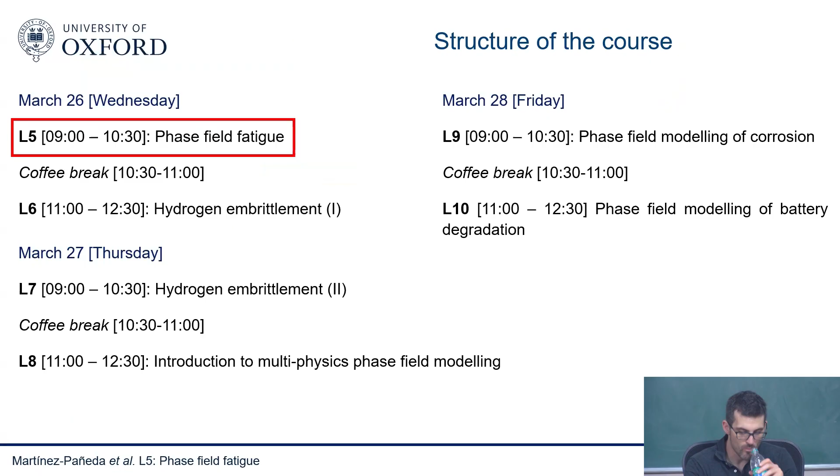A reminder of what we discussed in the very first lecture on Monday: there are basically various regimes in fatigue. We have a first regime where everything is very microstructural dominated, where most of the time you spend nucleating a crack—this is the most challenging regime in terms of understanding and prediction. Then we have a regime where you already have a macroscopic crack that is growing, following Paris law. Then there's a final regime where your crack is close enough to the final crack size driven by static fracture, so it just grows very fast.

So how do we characterize things in regime B? This is the Paris law—this is what everyone uses. It's still a bit empirical; you have a C and an M parameter that you need to fit to experiments. It would be great to reduce that empiricism, to actually figure out what this C and this M mean from more first principles, more mechanics.

The other regime is regime A, this first stage, where basically you're nucleating a crack. This is very microstructurally dominated, and normally we evaluate that regime with S-N curves. We run experiments where most of the time we're nucleating a crack, alternating a uniaxial tension test with cyclic loading until we measure failure of the sample. We get a lot of scattering, but we get these kinds of curves used in fatigue design. So these are the two ingredients, and I guess the question is, how does phase field fatigue fit into those ingredients? The idea is relatively simple.

So basically you add a fatigue degradation function that reduces your fracture toughness. There have been other groups following other approaches. This is the one proposed by the group of Laura De Lorenzis, a paper by Pietro Carrara and co-workers in 2020.

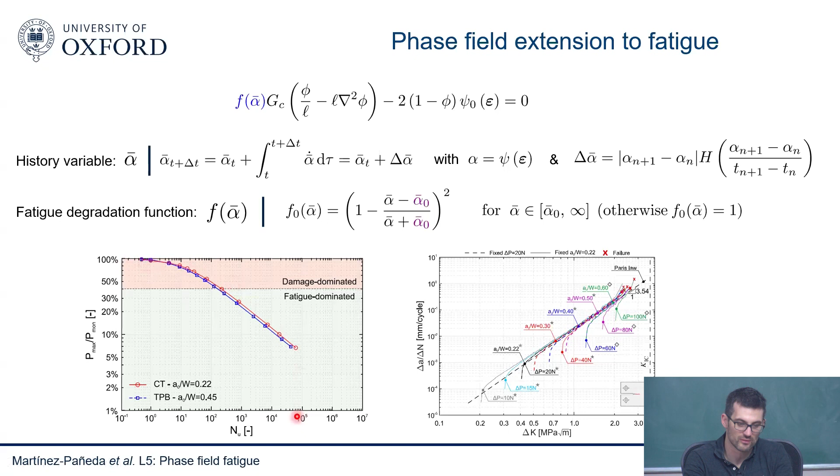But here you can see that, without any experiment, you capture both SN curves—this is load versus number of cycles to failure—and Paris law type of behavior. And again, the Paris law comes out of the model. Remember, Paris law has this C and this M—I don't put any C and M into this model, I just run my simulation, the same model that I use for an SN curve.

You can see here, this is for a load of 10 newtons. It goes like this, and eventually you fail. So it's not only Paris law, it's the entire regime—you can see that we capture the entire regime with this model. It looks promising. Again, there are some things to polish, but it looks quite promising, because a lot of people use Paris law, and you need to do an experiment, but that's okay, we can run an experiment.

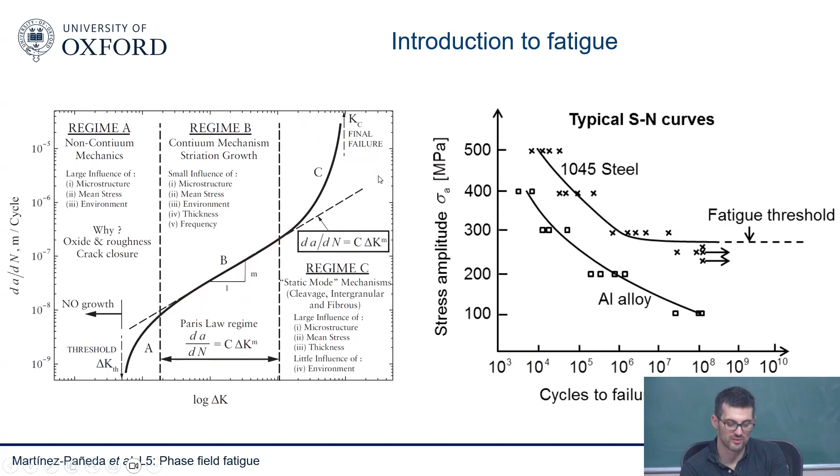But Paris law is only appropriate for a certain regime, so there's a danger that you're applying Paris law where it wouldn't make sense, on either end of the curve. So this model not only reproduces Paris law, but it's also able to capture the whole experiment from the delta K threshold all the way to complete failure. You can see it in all these cases for different load ratios. So it's quite promising—you can get SN curves and Paris law out of the model. It's not an input to the model, it's an output of the model. This is the main difference with other existing models.

We started working on this, and this was work done by my student Alireza Golahmar, who I co-supervised with Christian Niordson in Denmark. Aligesa was funded as an industrial PhD student by a company, Vattenfall, who are looking to extend the lifetime of offshore wind turbines. They operate and manage the oldest offshore wind farm in the world, called Horns Rev 1, in Denmark. These offshore wind farms, I'll talk more about when we discuss multi-physics problems, are supposed to last only 25 years, and the oldest one in the world, Horns Rev 1, is 24 years old now. So they very soon need to make a decision on whether to extend it or not.

Because fatigue is so empirical, that 25-year decision was something, you will see, a bit crude. So they were hoping to improve those predictions with some mechanistic modeling, and they funded this PhD studentship. But he had a very practical mindset, and said, I'm interested in publishing papers, but I'm also interested in coming up with something that is useful.

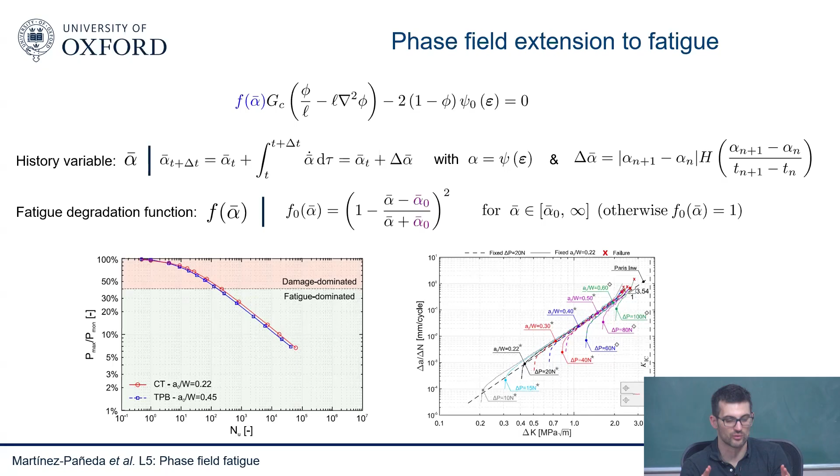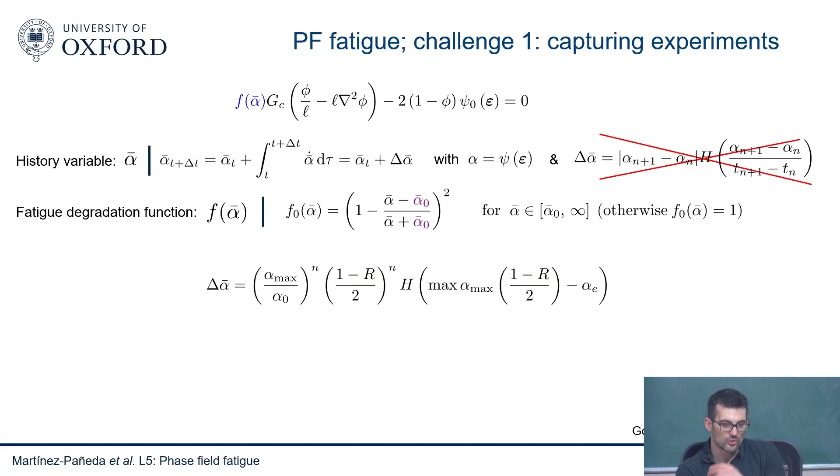So then he realized there were multiple challenges. The first one was that this model was all very qualitative, but when you try to fit experiments, it wasn't good enough. He needed more flexibility, so he changed his approach a little bit, changing the way we accumulate this alpha increment, and came up with this equation. He said, this is what I need to capture experiments.

The idea is that you have various ingredients, but basically you accumulate your cycling variable as a function of these variables. This is the Heaviside function, there's a term that accounts for the load ratio, there's an exponent n, and this alpha 0. So this is the load ratio that you apply, meaning we have an extra parameter. That's the price to pay, you add an extra parameter. But he felt he needed that extra parameter, otherwise he wouldn't be able to capture experiments.

But what was important was to define this n term that wasn't present before. We have the alpha 0, but we didn't have the n. With the n, he could see that he could capture any slope of the S-N curve. So the model that Laura's group proposed was good, but it didn't allow you to capture every S-N curve, at least with that fatigue degradation function. He was able to capture this S-N curve, and he also found a relationship between this S-N curve and the Paris law behavior, so the parameter m in the Paris law relationship could be related to this n behavior, which you can show theoretically for linear elastic materials.

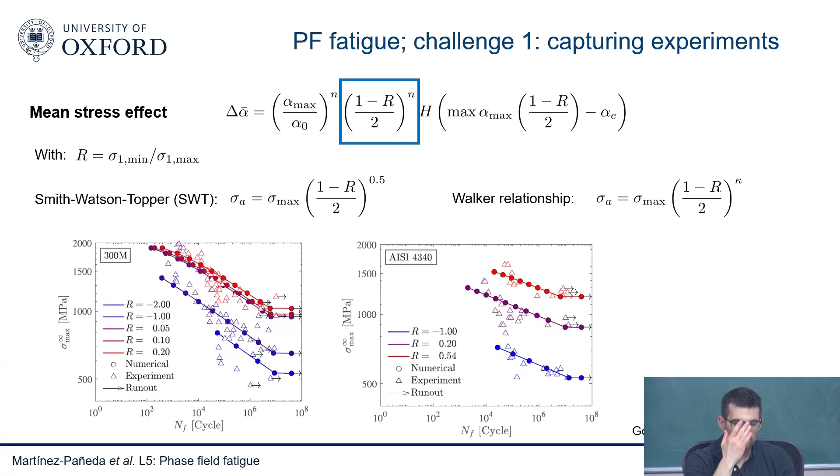Quick question: so the degradation, is it as a function of cycles? Do you upgrade at the end of the cycle, or is it happening also inside the cycle?

Yes, very good question, we'll discuss a bit later on. Initially we solve maybe 10 increments per cycle, so you solve the entire cycle. But it's true that you only accumulate damage in the tension part, and this is something we'll discuss in a minute, because different splits depend on which split you accumulate. Griffith will accumulate in both tension and compression, but in reality, we only accumulate in tension. So you have to do some tricks there, and at the end you end up accumulating only in the tensile part, which allows you to jump over cycles because you only care about alpha max. This becomes very important later on, because one of the challenges is computational cost. We're running cycle by cycle calculations, so if we don't need to do the full cycle, if we just have the peak, you can jump over cycles. This is a very good point.

Just to finish, the last ingredient here was the endurance limit. So he wanted to incorporate the endurance limit.

This is widely used by engineers, sometimes when you oversize things to make sure you are below the endurance limit. You have this Heaviside function, and you have this extra parameter, alpha E, but it comes from experiments. For each material we have tabulated data of alpha E, so it's an extra parameter, but it's again a physical parameter - we know what is the threshold.

You can see the relationship here. This is the definition. So I wouldn't say it's an extra parameter in the sense that the endurance limit of a material, we have tabulated data for each material, so we know this before we run the simulations. Just connecting a little bit with the seminar yesterday, ideally we want models where we know all the parameters before we run any simulation.

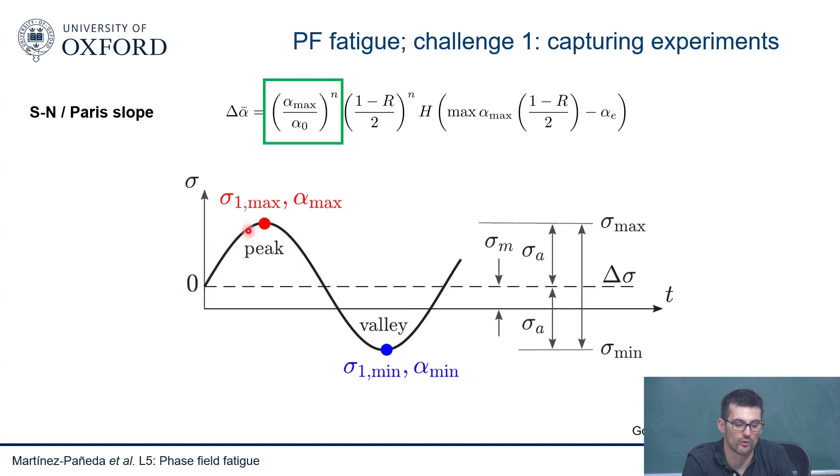So if we go here, this is important because it relates to the question Anna was asking. We want to accumulate here, we don't want to accumulate here. The no tension split is the only one that accumulates damage only here. And the good thing about this is that if we know the damage we accumulated here, we also know the damage we accumulate on the way back. So that's the only thing we care about, the alpha max.

So this is the second challenge. You need to pick a strain energy split that accounts properly for this decomposition between compression and tension. And it seems that the no tension split is the only one that can handle that. Otherwise, you're going to get very different responses depending on which strain energy split you use. The other aspect is the calculation time.

Being able to run fatigue calculations cycle by cycle is very powerful from a predictive perspective, because very often, of course, we do our experiments assuming a constant stress amplitude, but in reality we don't have a constant stress amplitude. Right? So we work with people, for example, in batteries where they charge electric cars, and they do have a history of loading, but every user charges their electric car in a different way, so the battery is exposed to a completely different cycling history.

So that's a problem. Normally in fatigue, the way engineers get around it is by assuming linear elasticity, superposition, and you basically do Miner's rule, so you accumulate damage here and there, some sort of accumulation of damage based on superposition. That's okay, it has worked for many years, and some things are falling down, but not everything is falling down. But there are many situations where this doesn't work out very well.

If you have an overload, or for example, when you have other phenomena happen like corrosion fatigue and so on and so forth, being able to actually handle any arbitrary loading history is very powerful. But of course, if you need to run millions of cycles with phase field, you need to resolve the fracture process zone, you need to resolve that length scale, so you need a fine mesh. If you need to do that, and in addition do millions of cycles, that's going to come at a cost.

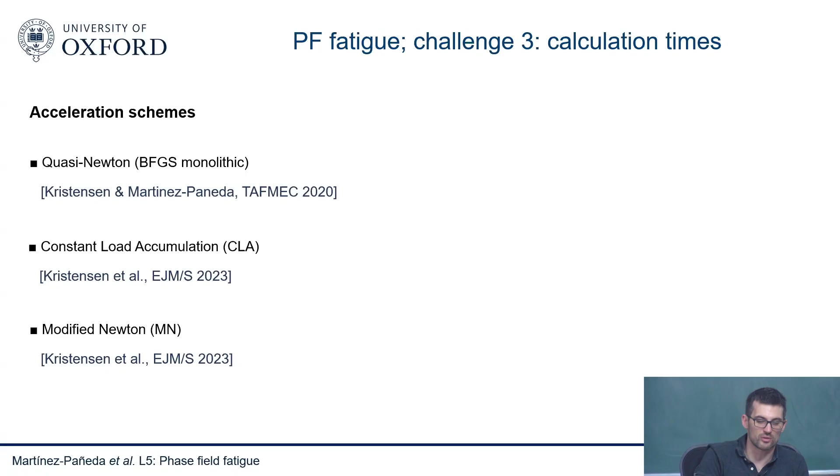So it's very much on the computational side of things. There's a paper by Laura De Lorenzis recently comparing various approaches. Our take on this was using first a quasi-Newton approach, this BFGS monolithic scheme. This was discussed the other day.

When you compare particularly to single staggered schemes, these are far more efficient. You can see we get the right result with 4 increments per cycle versus staggered approaches where even with 500 increments per cycle, single pass, you're approaching the good solution, but you're not even there. So that can be a deal breaker.

Every time you see single pass stagger results in fatigue, you need to take it with a pinch of salt because it's quite complicated.

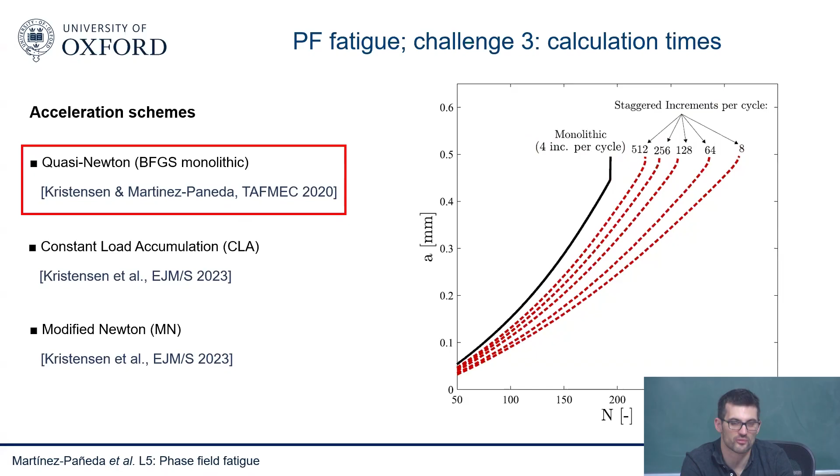The other approach is constant load accumulation. Since we only care about the tensile part, we may not have to resolve the entire cycle. This relates to the question Anna was asking - we don't have to go tension, compression, tension, compression. You could in principle just move along this line. You just need to know what load you're applying.

You can see here the different approaches, and you get exactly the same result basically. This is the original formulation, this is the constant load accumulation. At the end of the day, you accumulate the same alpha with the number of cycles. You just need to think of your alpha max.

And then you can combine this with something called cycle jump. This is used quite a lot in computational mechanics when you do fatigue. If you imagine modeling millions of cycles, 20 million cycles, then cycle 1,234 is likely going to be quite similar to 1,235. You're probably going to accumulate the same amount of damage. So maybe you don't need to do every cycle - you can do 1 cycle every 10, 1 cycle every 100, and so on. That's another idea, this kind of cycle jump.

You need to be careful not to jump too fast. Some people are now coming out with error schemes that tell you how far you're deviating. The other approach we took was this modified Newton method - if the cycles aren't changing too much, maybe you don't need to build the stiffness matrix every time. You could just solve with your original stiffness matrix and rebuild every X number of cycles. With the combination of 2 or 3 of these acceleration schemes, we are getting to calculation times that become sensible.

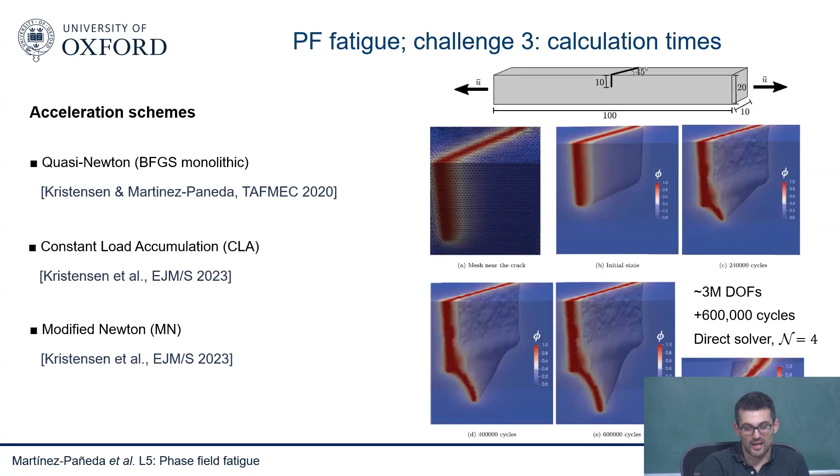Yeah, I guess one can play with those things. I don't expect big gains on that front. Yeah.

And I think what was interesting about these models is that it's a paper we have almost done. We haven't submitted it yet, but we were quite excited to show that we can predict the relationship for linear elastic materials. For plastic materials, there are other things happening. But for linear elastic materials, we can go from SN curves to Paris law, and this is something that hasn't been done before.

So these two stages of fatigue are treated independently: one is Paris law, and the other is the SN curve. You could think both must be connected because both tell you how a material degrades under cyclic loading, but they had not been connected. We can see that this is the case with our model - we run simulations for different values of this n coefficient.

And we get different slopes when we run the Paris law. So somehow there's a relationship between the slope of the SN curve and the slope of the Paris law. We can show this is not only qualitative, but also quantitative. We've shown theoretically, through calculations and integrations, that by considering a damage mechanics approach, you can determine that the C value and the M value of the Paris law are related to the SN curve.

So M is related to the inverse of the slope of the SN curve, and C is related to the fracture toughness parameter that depends on the fracture toughness and M. And here you can see the comparison of the model with experiments on PMMA.

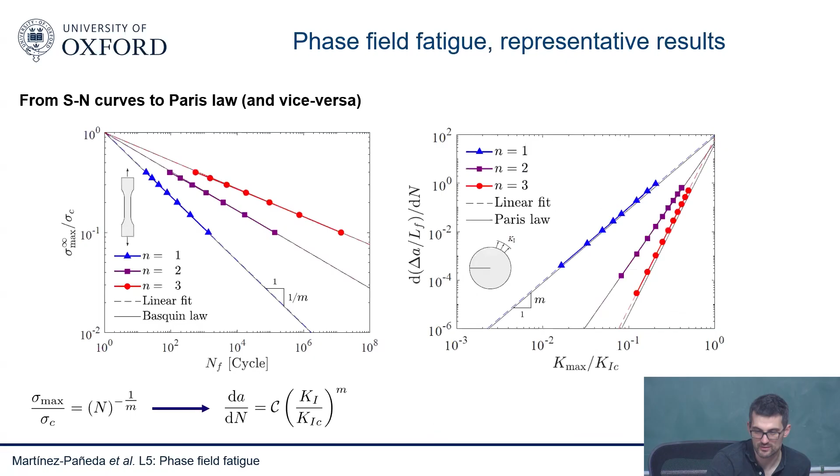Correct. So how do you implement the R ratio experimentally in those cases, especially in the case of Paris law? How do you account for the R ratio? Yes, so the model has an R ratio component. This R ratio component becomes more significant in the case of the SN curve, while it becomes less significant in the case of the Paris law, because it's more toughness dominated versus strength dominated failure.

So it seems to... we don't have extensive validation, so it's very difficult to find data in the literature for this. It has to be linear elastic materials, like PMMA, where they do SN curves at different R ratios and Paris law at different R ratios and so on. But so far it seems to be working okay.

Again, for linear elastic materials, in elastoplastic, high regions of the SN curve, you have a change in behavior and there's other things happening. So again, very much ongoing work.

We haven't even submitted this paper yet, but I think it's exciting in the sense that we finally understand a little bit of what's underlying this kind of Paris law, which was very empirically driven, and this kind of SN curve behavior, this kind of Basquin's law, which is also very empirically driven. The idea that you can go from one test and predict the other one, that's I think also quite powerful. So I'm excited about this. It's still ongoing work, there's things to polish, but I'm excited in the direction that it's going.

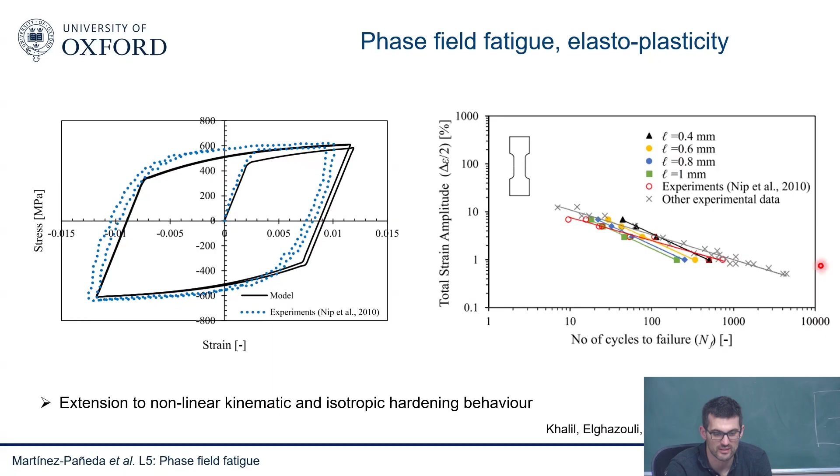So what we did here was to extend the constitutive model to account for nonlinear kinematic and isotropic hardening behavior. You can see that it reproduces the cyclic response that you expect from metals. This is for some steels, and the model seems to agree with what we see in terms of the SN curves, in this case, total strain amplitude for low cycle fatigue.

Yeah, I guess the takeaway is that you can combine these phase field models with any choice of constitutive model that you feel you can incorporate here. Of course, the more things you add into the model, the more you need to think about things, and the more choices you have to make.

So for example, here we have this alpha that you accumulate, the elastic plus plastic strain energy density. We normally assume that only a percentage of the plastic work is stored. But when you're talking about fatigue, for example, a lot of the community that do crystal plasticity and so on typically consider only the stored plastic energy, because they say it dominates completely the behavior ahead of a crack. So the picture becomes much more complicated, and there are some choices one has to make.

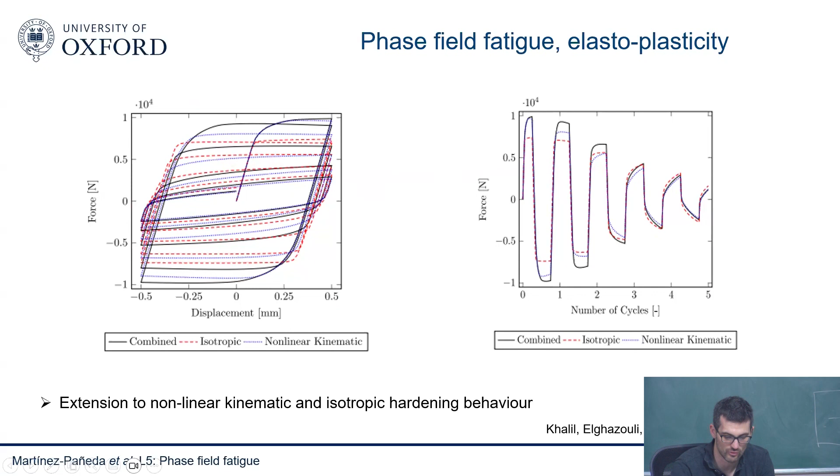So, again, very much an ongoing discussion, nothing consensual yet, but I just wanted to show you that you can calculate this isotropic nonlinear kinematic behavior and incorporate those things. And you can do that not only in small scale samples but also large scale samples. You see a pipeline here where we did this sort of fatigue simulation, and you can see the propagation of cracks and so on.

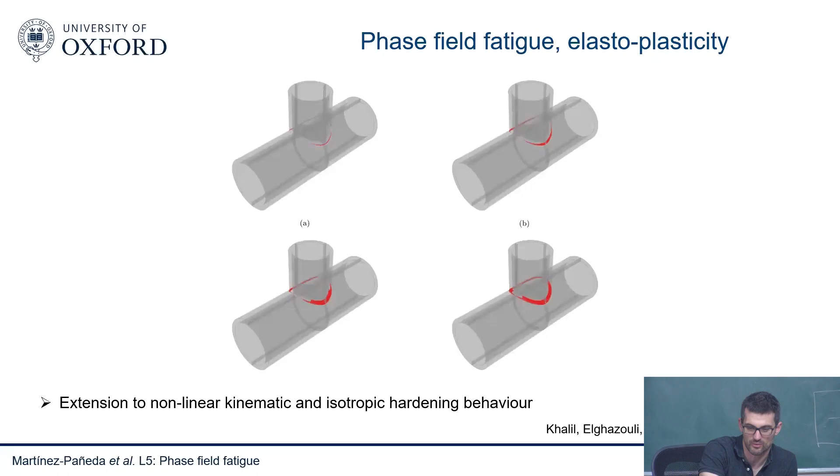Okay, the last item I want to cover before the break is related to fatigue and the impact of surface roughness. We were just talking yesterday, visiting some of the labs here and talking with one of the academics, explaining how much they're interested in the impact of surface roughness on fatigue life. This is a well-known effect. We know that surface roughness has a significant impact on fatigue life, so people are quite worried about that.

Normally there's a number of reasons why you may get a rough surface. One of them is your manufacturing method, and this has become a very hot topic due to additive manufacturing. But the other one is corrosion and problems like this. If you have some sort of aggressive environment, you get a rough surface, and then you get a degradation in your fatigue life. You're not sure whether the degradation is due to the effect of the rough surface, or the combination of corrosion and fatigue, and so on and so forth.

So there's significant interest in trying to quantify this effect of surface roughness, particularly these days due to additive manufacturing. We know that we get a rougher surface in additive manufacturing, and we know this is going to damage our fatigue life. How much is it going to damage our fatigue life? How much do I need to improve? What kind of treatments do I need to do? This is something that is well known.

So for many years, people have been working on this, and I'll talk about work that my postdoc Sara Jimenez Alfaro has done. The paper is currently under review. But basically what people do in the community, the fact that your fatigue life degrades significantly with roughness is something that people have known since, I guess, the 70s or so, quite a long time ago. And people came up with basically what they call a surface factor, this KS, surface factor.

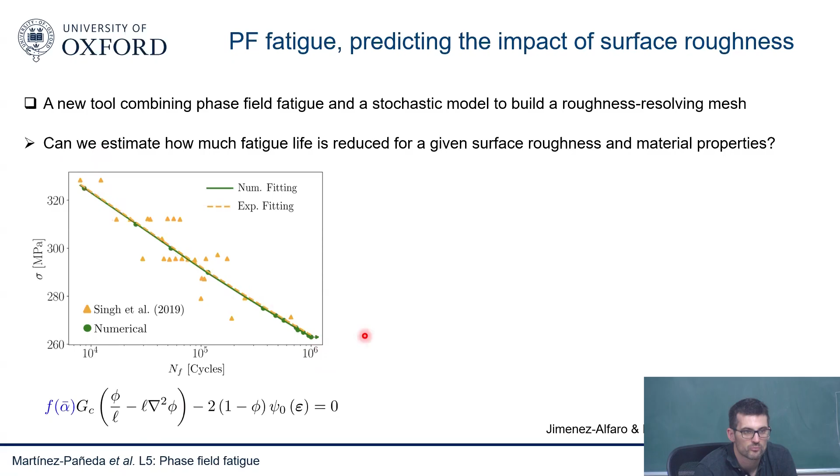Now the question is, what do you do with the roughness? You need some sort of statistical model, so you need to develop a new finite element tool that allows you to capture this. People normally quantify roughness using typically two parameters: this RQ, which can be related to another one called RA, and a correlation length. This will be the case, for example, of a perfect roughness — you have basically a quantity, which is the normal to the surface, giving you how much roughness the surface has, like a bit of white noise.

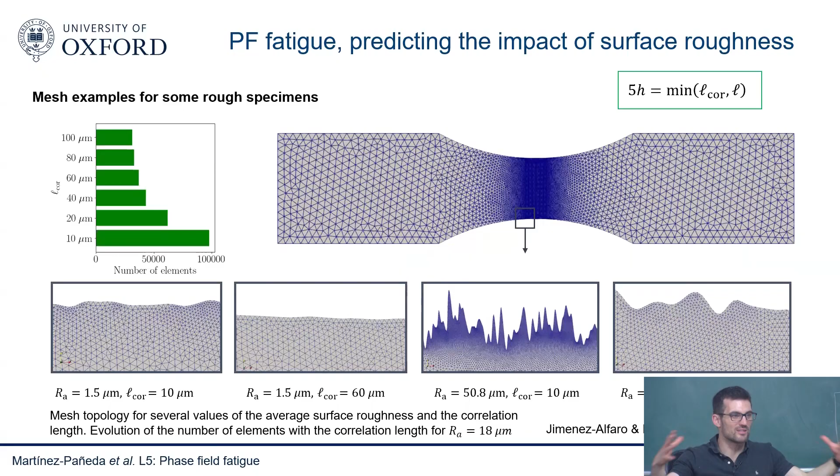But every time you generate a mesh like this, there's going to be some sort of a stochastic element. You're generating some noise, so every mesh that you generate is going to be slightly different. So you need to run enough calculations to get a statistically representative result, and then you get a bit of a scatter. So once you do that, you can compare with experiments.

Let me see, yeah, you can compare with experiments. I forgot to include an image, but you can see that when you run more than 30 calculations, more or less, you start seeing your margin of error decrease. So you start seeing how the number of surfaces that you tested for those two variables start seeming enough. But basically, this is what you get.

They didn't provide that value, so we had to basically take a range of parameters between the values that are typically reported in the literature, which means that we get a bit of variation in our calculations.

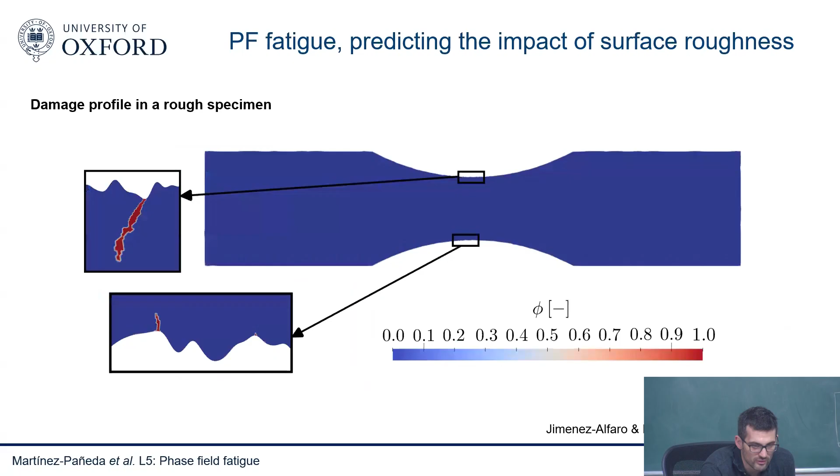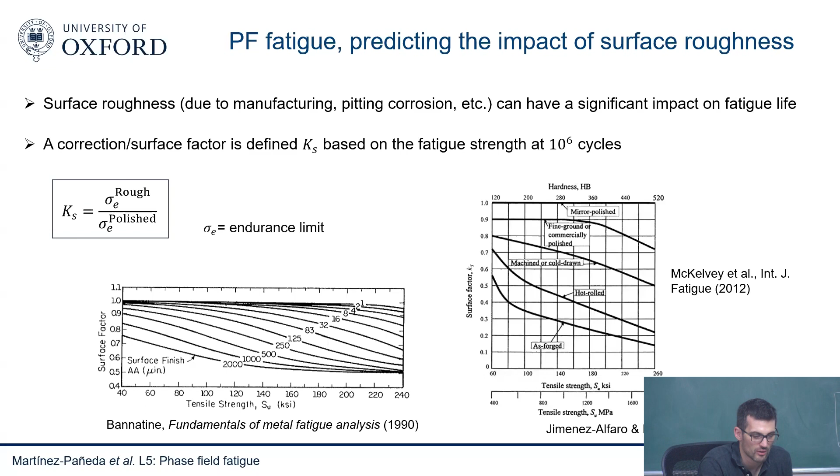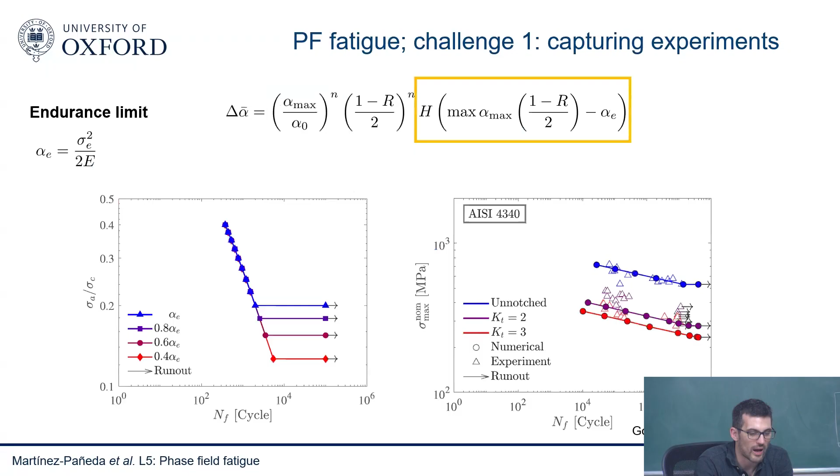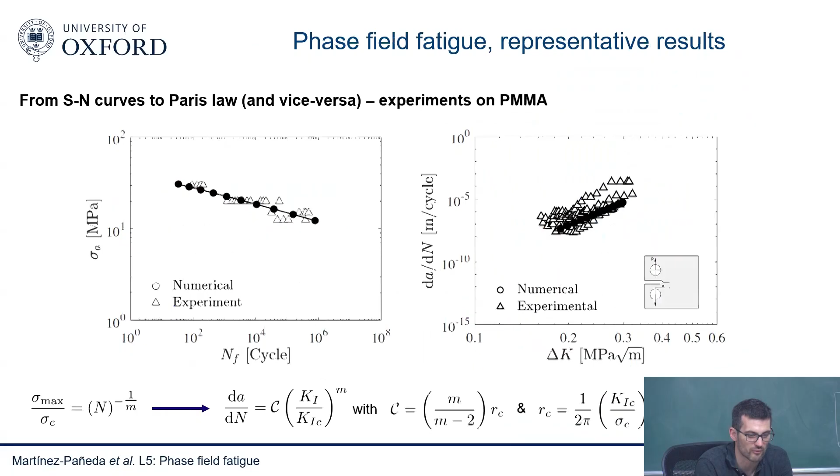The way we capture this is by running some sort of statistical analysis where we have a way, taken from the optics community, of generating surface roughness as a function of two parameters. We have some white noise in there, and therefore we need to run a statistical analysis, because the predictions of phase field—this is deterministic in a way—might depend on your surface roughness, even for two parameters that you've chosen.

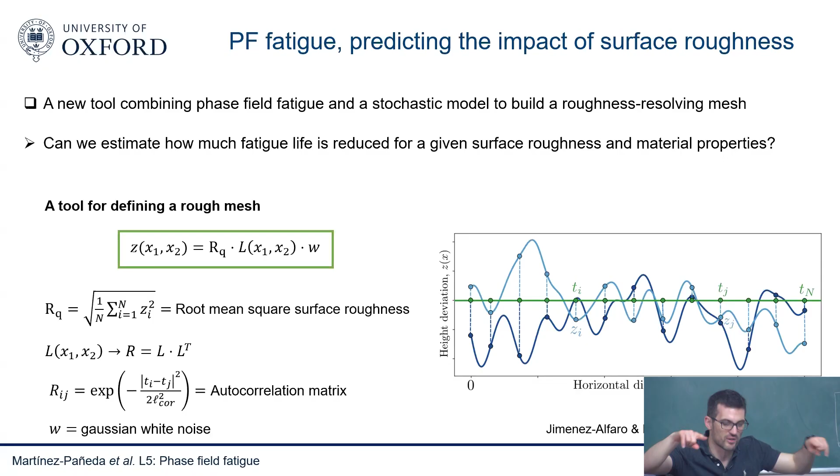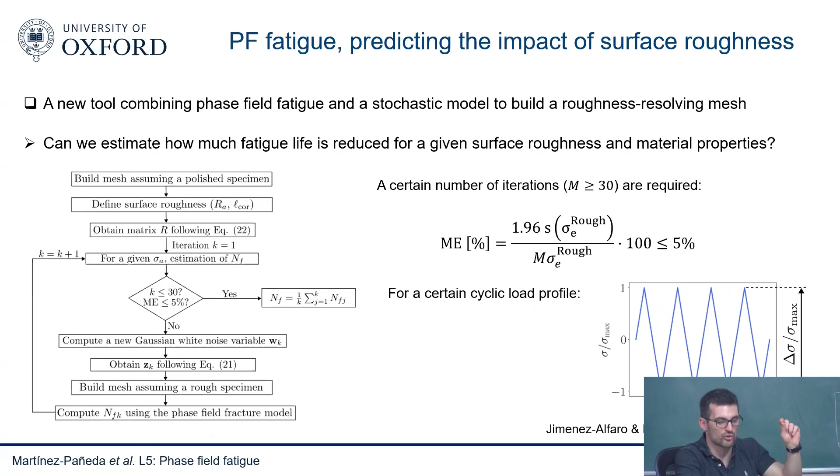So we run enough calculations. We calculate the margin of error. We make sure that our margin of error is within a certain percentage, and then we can determine the fatigue life for each of those calculations.

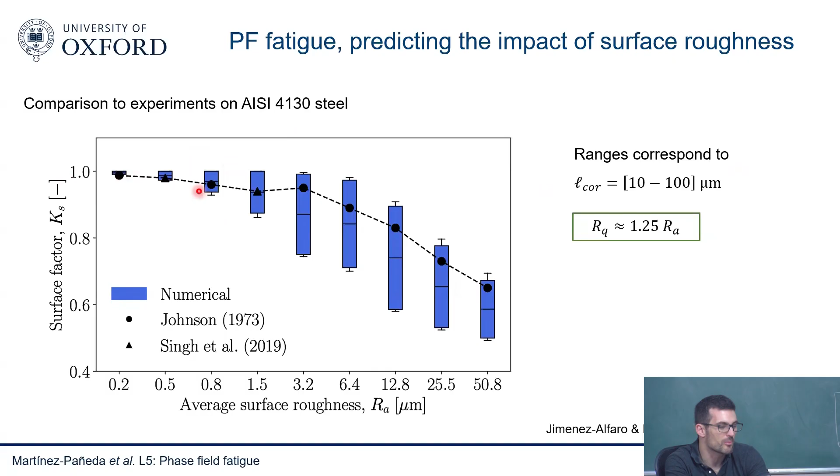As you can see here, the prediction matches experiments, even though there's a bit of scatter because of running multiple simulations, and because here we didn't know from the experiments which was the correlation length—we seem to capture the data quite well. And importantly, we can build these sort of maps where we can tell what is the degradation in fatigue life that you're going to get.

This is quite important because, as you can imagine, for example, in offshore wind turbines, the project that Sarah is funded for is based on offshore wind turbines, so they have a lot of pitting corrosion, and they want to figure out from that pitting corrosion what will be the impact on their fatigue lives. So you can run the simulations and predict what will be the impact on the fatigue life.

Okay, I think that's all for phase field fatigue. Any questions?

Yeah, it's a bit puzzling to me why the fatigue degradation function is degrading the fracture toughness instead of the stored energy or the elastic energy. When you started phase field, you were degrading the stored energy, so the phi was on the right side, right? Where it is, phi was used degrading the side.

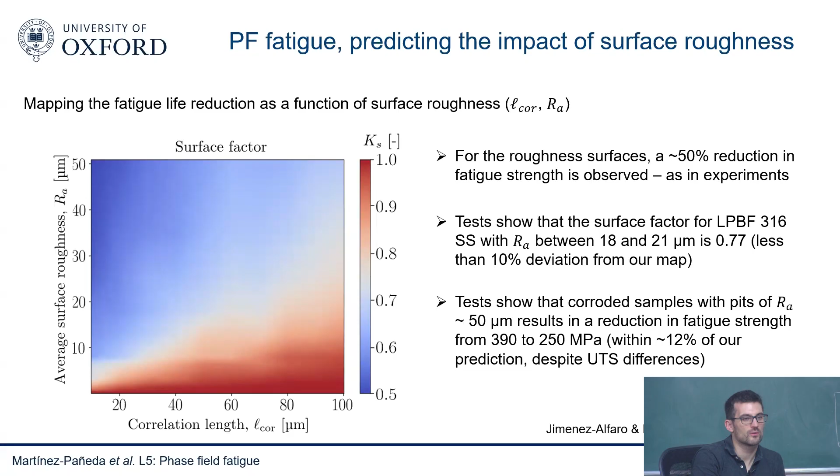So let me go back here. It's a choice, maybe yes here. So it's a choice. We have a driving force, and you have a fracture resistance, toughness, and an accumulation of your driving force for fracture, stored energy.

Some people have argued in the phase field fatigue community that it's a little bit the same for the phase field ductile fracture community. So there's been two approaches. Some people say, I want to enhance my driving force, I want to maybe increase this with the number of cycles, or I'm going to degrade my fracture resistance.

I tend to like, and I did the same for hydrogen, I tend to like to degrade my fracture resistance because I see it as more physical—maybe it's a bit philosophical, but a bit more physical in the sense that this is what I think is happening in reality. Hydrogen is degrading my bonding strength; fatigue, this kind of accumulation of cycles, is degrading a little bit my resistance to fracture. But I guess you could think of it as well as a driving force. You could say I have a static driving force, and now I have something that is enhancing my driving force, or something along those lines.

It's a little bit inconsistent if you just take phase field fracture for brittle materials. Even there, you're still saying once a crack is propagating, your fracture toughness of the material is actually degrading. So you could actually have the 1 minus phi.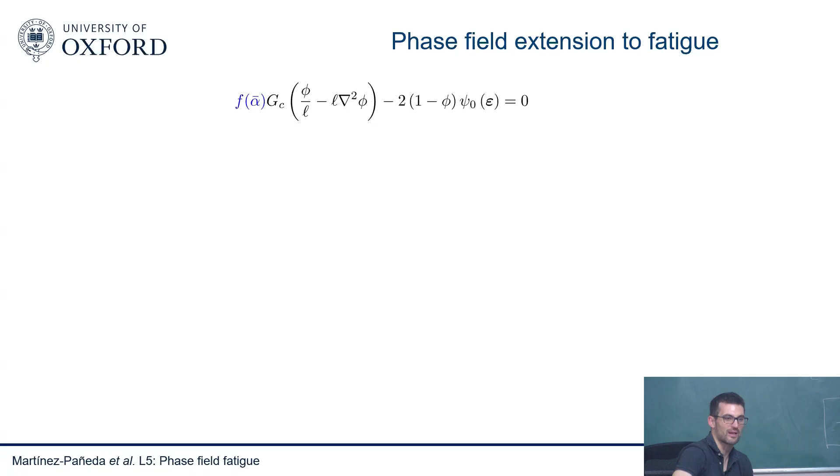So they say with the number of cycles, I'm not only storing this energy, I'm storing a bit more, something more. Therefore, the toughness remains the same, but cracking becomes easier because this accumulates during cycles. I still kind of prefer my approach, but it can be a personal viewpoint thing. I prefer to think my accumulation of cycles is degrading my fracture energy, but I saw a very good talk by Roberto Alessi at COMPLAS some years ago where he made an argument for both cases, and it sounded convincing. You could always do it in both ways.

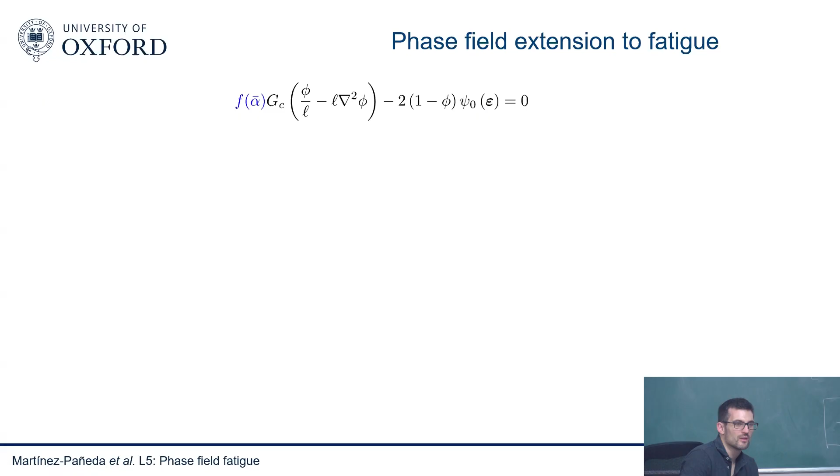So is it okay to think that the fracture toughness of the material is degrading because of fatigue? I think so, and that's consistent with the KT diagrams that the fatigue community uses quite a lot. These KT diagrams tell you the transition flaw size as a function of number of cycles, and the transition flaw size is basically how it changes between the failure stress versus crack size as a function of strength.

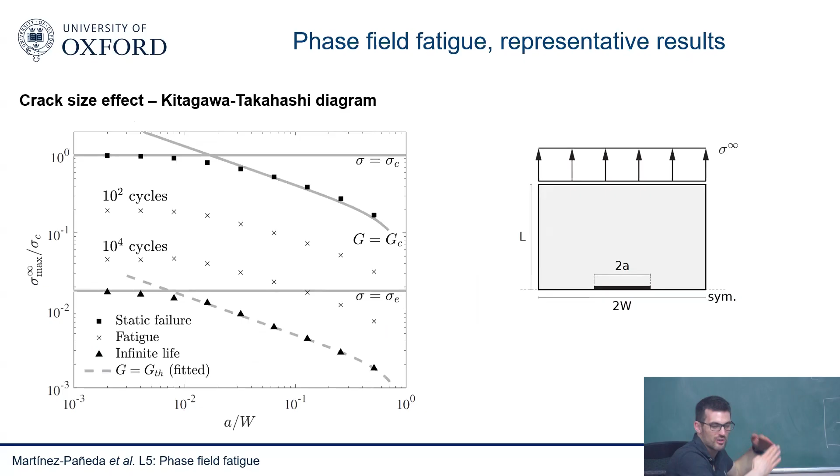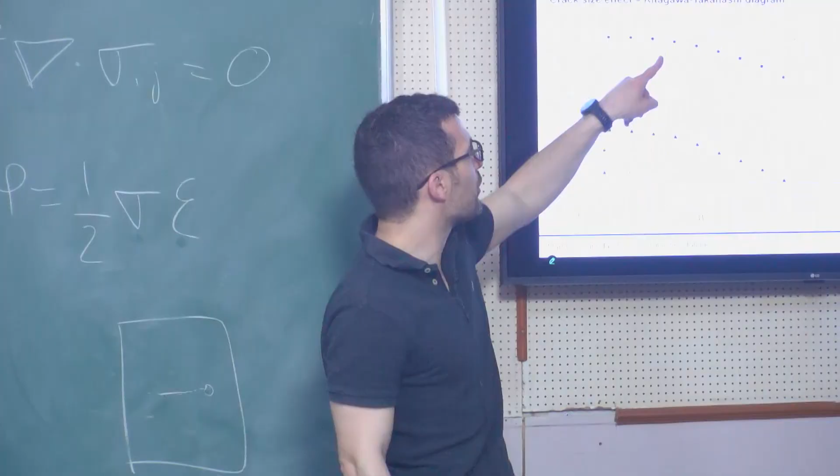Strength isn't going to change that much statically, but it will change with fatigue, of course, and also the fracture energy changes. I think it makes sense that we know the transition flaw size goes in this direction, the static case, so experiments show it all the time. For it to go in this direction, I guess this could remain the same and this could just go down, but then it would go somehow in this direction, right?

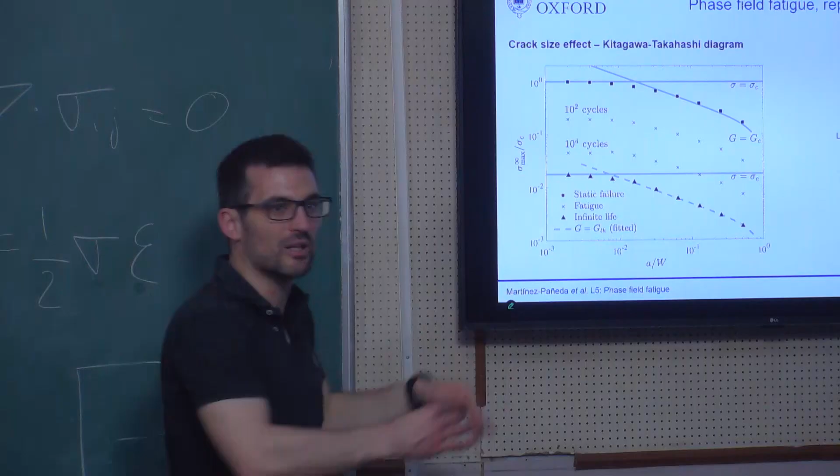So in order to go in this direction, both curves need to go down. To me, it's the most sensible approach. It's a bit philosophical, and probably you can get the same kind of qualitative results whether you pick one or the other, and this seems to be what we see in the community. But I do like this idea, and I don't know if you'd be able to recover this type of behavior with the driving force approach. Maybe you do, I don't know, I haven't run that calculation.

What about the length scale parameter? Like GC is degrading, so maybe L is also a material property. Yes, if you remember the equation for the relationship between strength and sigma, it was something along those lines: you have E, you have GC, and then you have L, and some sort of constant factor.

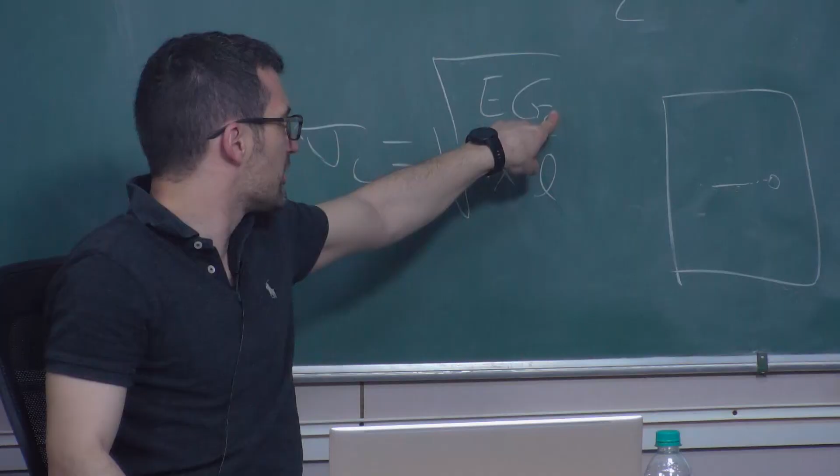So it is true that by degrading the toughness, you are already degrading the strength. That's why you see this drop in the KT diagram. That being said, is this the way the strength should be degraded? It's a little bit similar to the hydrogen problem, it's the same thing. We degrade this, and automatically it's degrading the strength, and we see this type of behavior in experiments.

So the qualitative trend is the same, but is this the right relationship? Should we do something else here? Should we also change the length scale a bit so the factor is the right one? Difficult to tell, but it's a good question.

So far we're assuming this will get us far, and it seems like we can capture SN curves, which are strength dominated, and Paris law with the same scheme. So things seem to be going in the right direction, but it's an open question. I guess one could refine the details further.